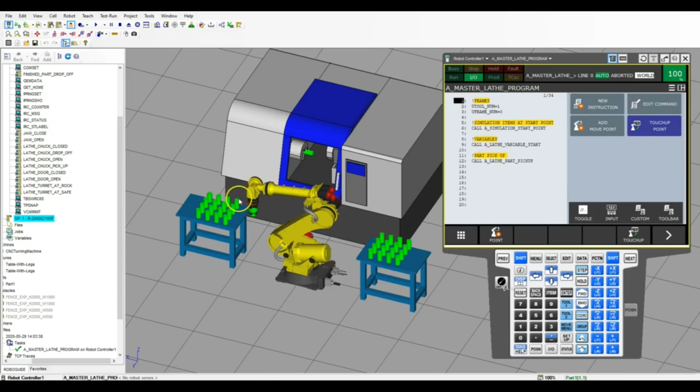So far we've got our frames, our simulations at start point, which is everything at rock and roll as if it was cutting. We have our variables, and inside our variables we initialized a bunch of position registers and also data registers. Then we have a part pickup, so the robot is ready to pick up and it goes back to the home position.

Now we need to start setting up the lathe position. The first thing we need to do is get the lathe to be in a safe position. Let's insert a new instruction, miscellaneous remark, and this is going to be our 'lathe safe and ready.' Now that we have that, we can first open our door.

So let's create a new program, and we're going to call this 'A lathe safe and ready.' Inside here, we're going to insert a new instruction and call it. The first thing we're going to do is open the door, so lathe door open.

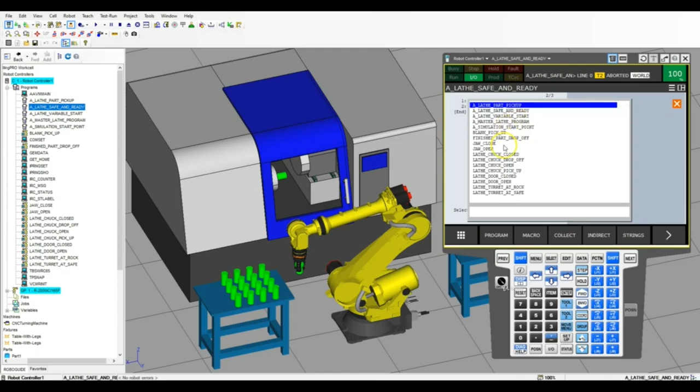Then we're going to put our turret in a safe position as well. New instruction, call program, lathe turret at safe position. And then we also want to make sure that the jaws of our chuck are open as well, so new instruction, call program, lathe chuck open. Now everything is at a safe position.

Let's go back to our main program, master lathe. So we made a master lathe program, and inside here we're going to insert a new instruction, call program, and go to lathe safe position, so lathe safe and ready.

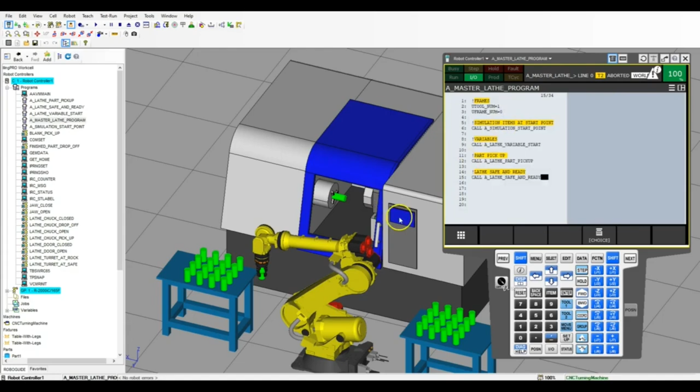So far, if I run this, it goes to pick up, clamps open, everything goes to safe position, clamp opens, and now we're ready to place our robot into the machine and then place our part into the machine. Let's go to lathe pickup, then new instruction, miscellaneous remark, and this is going to be lathe place.

And inside our lathe place, we're going to create a new program. So we're going to go select, create, and inside here we're going to call it 'A lathe place part.'

Then we're going to make sure our registers are all good, so I'm just going to remark frames, U-tool number 1, just in case. Best thing is to just be redundant so that things don't happen. Let's go edit command and insert about 20 lines so we have enough.

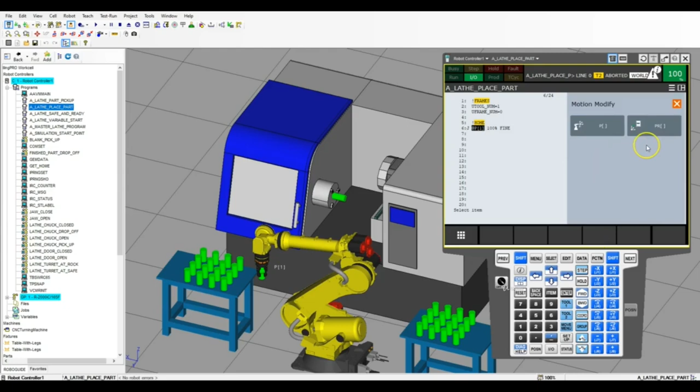And then the first thing we want to do is make sure we're in home position, just in case. I know we're in home position right now, but it doesn't hurt to make sure that we are in home position every single time we do this. So we're going to do a joint movement, and we're going to go position register number 1, home position.

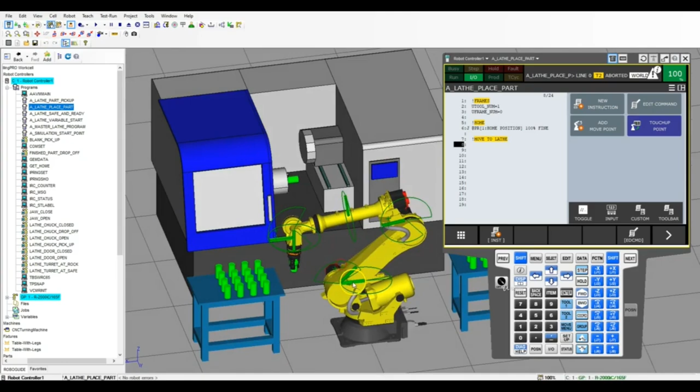Okay, so now that we're in home position, we're going to save a couple points and move our robot around. We can do that by first naming this—we're going to call it 'move to lathe.' I'm going to do this with a joint movement, so I can click inside here and start moving this around.

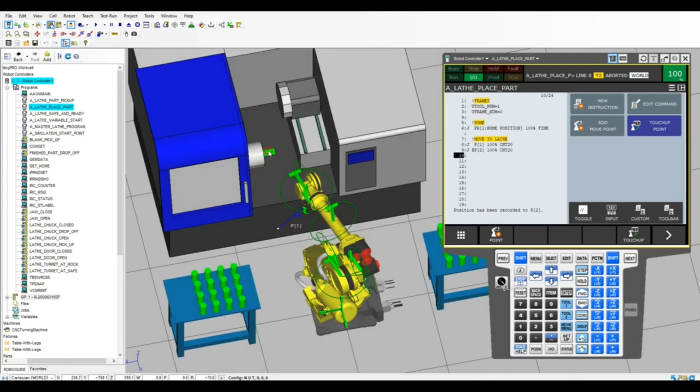So I'm going to add a move point and do a continuous move. Then I'm going to add another move point and do a continuous move again. I'm getting this into position and making sure I'm not going to run the robot into anything. Then I'm going to move to this position right here—I'll click the machine, go to parts, and then move to. We move right to our part exactly where we need it to be.

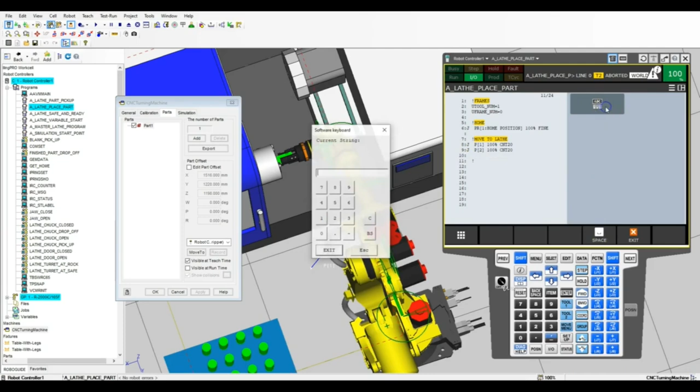So then we want to move into this position, including a safe position. I'm going to insert a new instruction, miscellaneous remark, and this is going to be my 'place safe position.' Then I'm going to add a move point and do a joint movement to that, and this is going to be position register number 3.

So I'm going to choose position register number 3, which is our lathe chuck that we saved from our previous video. And then we're going to add our tool offset, so right here we're going to go tool offset, position register.

Let's see what position register it was for the tool offset—I think it was 15. Moving on down, we have our original tool offset, which is the pickup and place. Our lathe tool offset is 15, so let's go back to edit and use 15.

So now that we are in that safe position, we want to move to the actual position. I'm going to go new instruction, miscellaneous, remark, and this is going to be place to chuck or move to chuck. And we're going to add a move point, doing a linear movement into that.

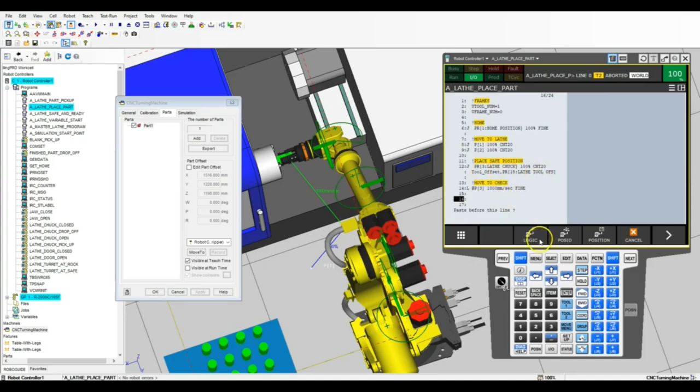So now that we have our safe position, move to chuck, we also have to now place our items. We need to add a few lines in here, and this is going to be the placing of the part. So we go new instruction, miscellaneous, remark, and we're going to say place this part.

I'm going to actually go simulation, new instruction, and then we're going to call program, and this is where we're going to place our object. So here we have lathe chuck drop off, so let's call that program. Then we have our safe place, so it should now move away from our position, and then we would move out of the robot as well.

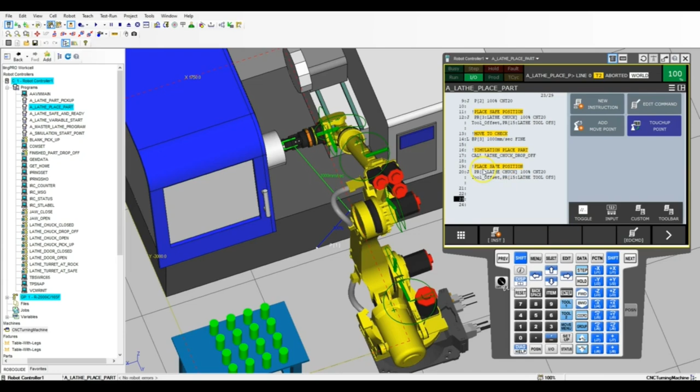So let's actually just run this and see what it looks like. Let's go to home position. Drops off, moves out. Okay, so looks like everything is good.

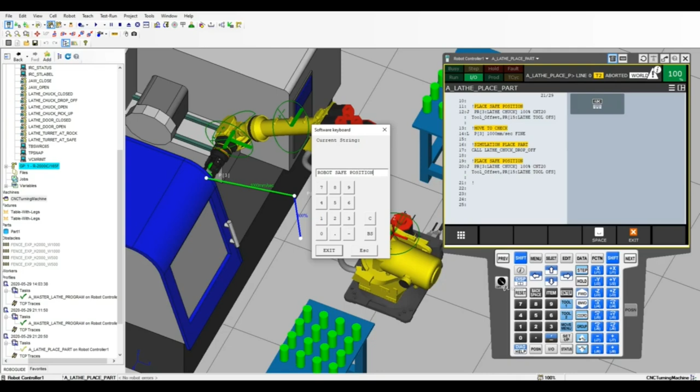Now we need to move our robot directly out so that the door can close. Let's go down to our area here, and we're going to now call this robot safe position, out of the way. And now we're going to add a couple different joint movements here so that we can get our robot out directly without moving it side to side.

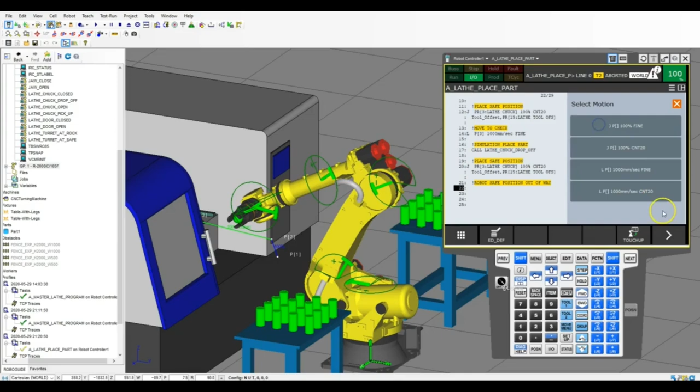So we just move it off to the side here, and I may do this in a couple different rotations. And we're going to do a linear movement out here so we know we're not jogging into anything else that we're not supposed to. So I'm going to do a linear fine from that position, keep moving it out, making sure that we are directly out of the way.

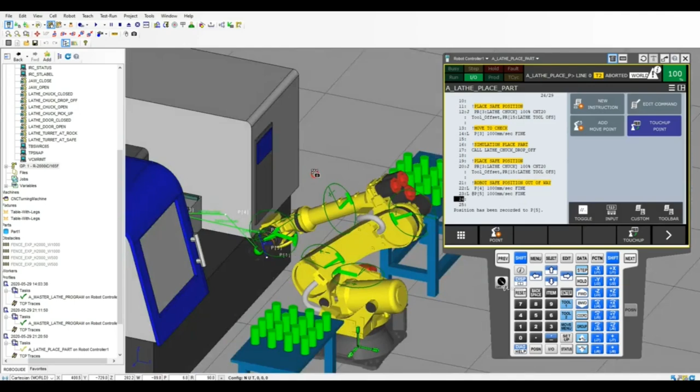It looks pretty close. Let's move this down just a hair bit. There we go. So now I'm going to add a move point, and then we're going to do a linear to that as well. So now that I have my robot out of the way, this program is now set.

So let's go back to our main program, master program, and then here's our lathe place. We're going to go new instruction, we're going to call program, we're going to go to the lathe place part. So now we have our lathe place part.

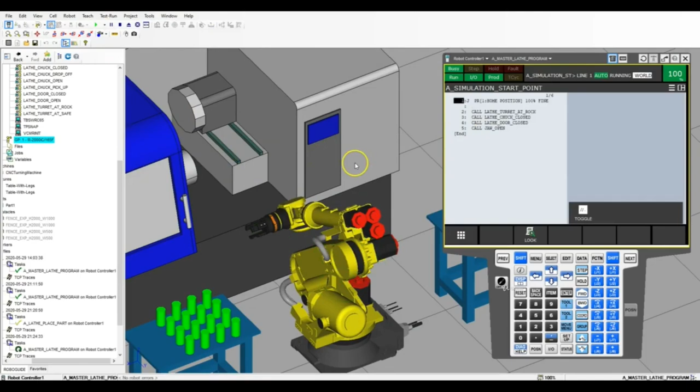So let's try this whole entire program out. I like to always try things out to make sure everything's working. Awesome, so far we got the robot out of the way, so now we need to put our lathe into rock and roll position. We actually already have this in rock and roll position, it's actually simulating the start point.

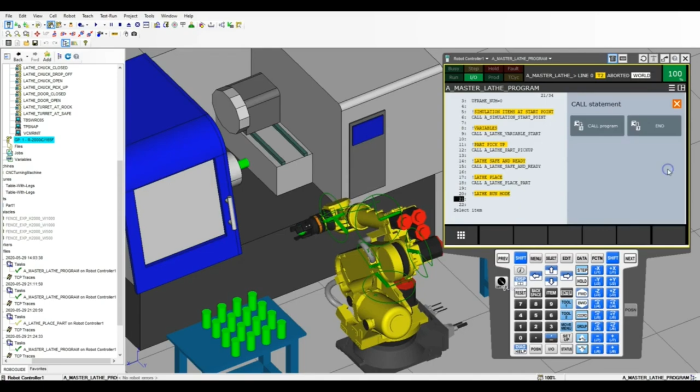So let's go new instruction, and let's turn on teach pendant first. Remark, and then we're going to run the machine, lathe run mode, and then we're going to go new instruction. We're going to call, and it's going to be simulate start point. Actually, I think simulate start point opens our chuck.

So going into simulation start point, it looks like we have a home position, lathe at rock and roll. The chuck is closed, which is good. Door is closed, and also the jaw is open.

So basically what we need to do is we need to get rid of this home position here out of this program so that we can use this. So let's actually delete this home program. I'm going to go in here, I'm going to go delete. Yes. So now it's doing everything that we need it to do.

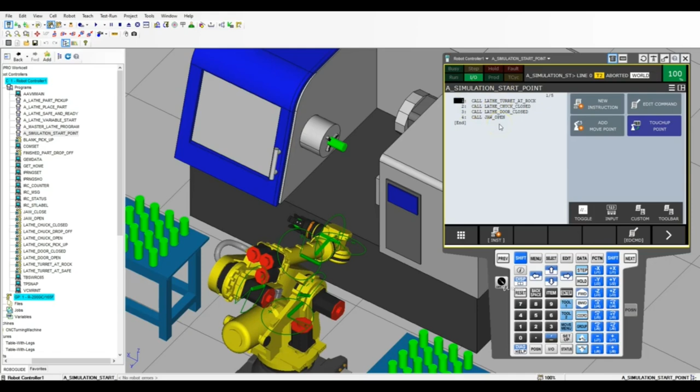So now let's go back to our program, master program. And before we get the simulate call starting point, let's add a home position before this as well. So we'll insert one line. We're going to go add move point, and we're going to do a joint movement, and this is going to go to our home position. So we're just taking it out of that program and placing it into our main program.

So now we have our home position, call simulation program, and now we can use the simulation program down here as well. So now our simulation program, now it should run the way it's supposed to. So let's check this.

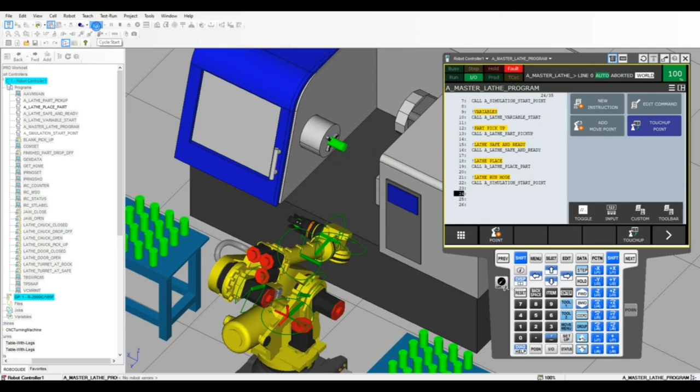There we go, so now we have our machine running. We could do a runtime of so much time, so let's do a wait, and let's say it's running for 3 seconds.

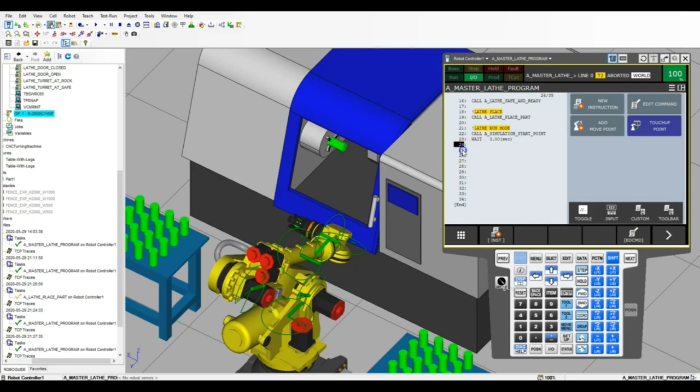Now that it's running, we need to open up the doors and everything else. So now that the lathe is ready, let's go new instruction, miscellaneous, and we're going to do this as a part pickup. Part pickup from lathe. The first thing we need to do is make sure our door is open.

So let's go and create a new program. Let's go select, create, and let's call this A.

And once again, just making sure that we have the proper frames correct. Always like to put in frames just to make sure that everything's good, just in case something moves. And I'm going to add some lines here, so I'll go 10 or so.

And now we're going to do the lathe safe, so new instruction, call. The first thing we want to do is open up the door, so lathe door open.

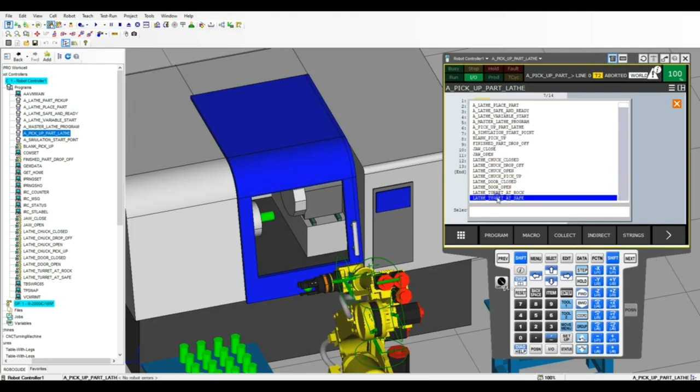And then we're going to move the turret out of the way, so we're going to call program, lathe turret safe position. So now that we're in safe position, now we need to move our robot back into place.

So we can now move back into here the same way that we did from our previous program. So let's actually move these things out of the way. So when we click number 5, I'm going to step, shift forward.

So now we have our stuff open and out of the way. So here we're going to move to safe position. Move to position inside lathe.

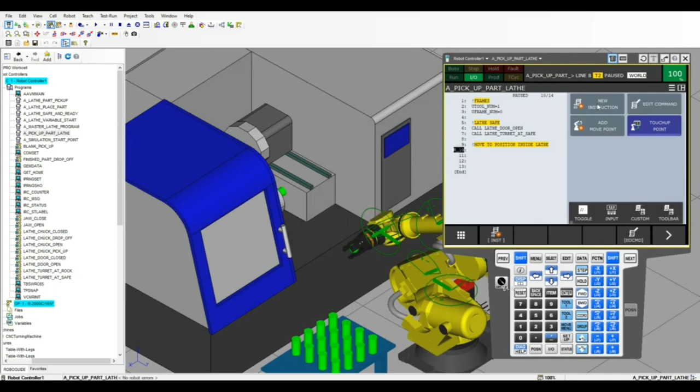So this one I'm going to start saving a couple move points here. Moving my robot in, making sure that we're doing a linear movement. There we go, and then we're going to now move to our safe position.

Insert a couple lines. And now we're going to match what we did for the placement of our object. So now we're going to add move point, and we're going to do a continuous, and we're going to use a position register here, position register number 3, and we're going to add our tool offset of 15.

So now that's at safe position. Now we're going to do the pick up position, but first we want to make sure that our claw is open. We never assume that things are open, we want to make sure that it is.

So basically inside here where we do the call, let's move it up here so that we know that our claw is open. So let's go new instruction, call program, and let's do jaw open so that we know that it is open before it even gets into the machine.

Now, yes, it is probably open from our previous program, but we never assume things. We always add it in there. It will just skip it if it's already at that position.

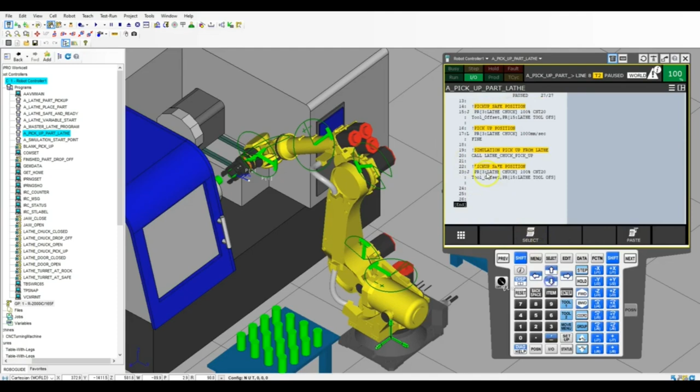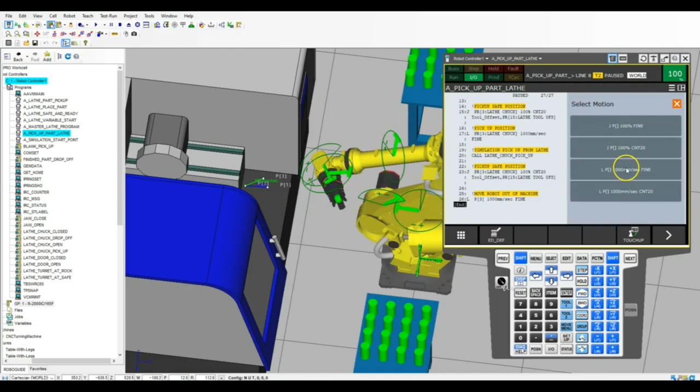So now we're out, and now we need to move out of the machine. Go add move point. I'm going to do this as a joint movement, and then I'm going to move it to the side to get ready for our movement inside here.

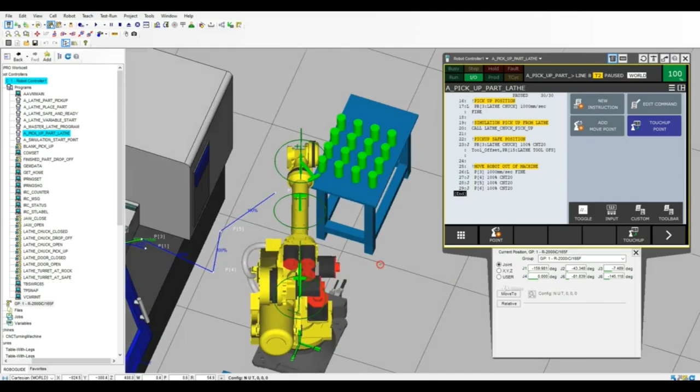There we go, so our final position from that place. Going all the way down and around and out of the machine. Then we can put our machine into our safe position.

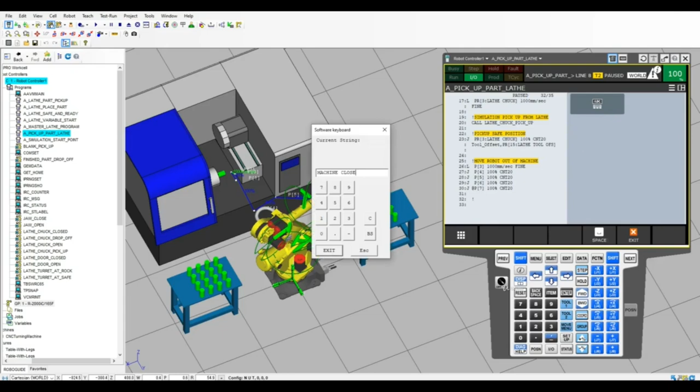And then let's call on that program to close up our machine. And then that ends our program. So let's go back into our master.

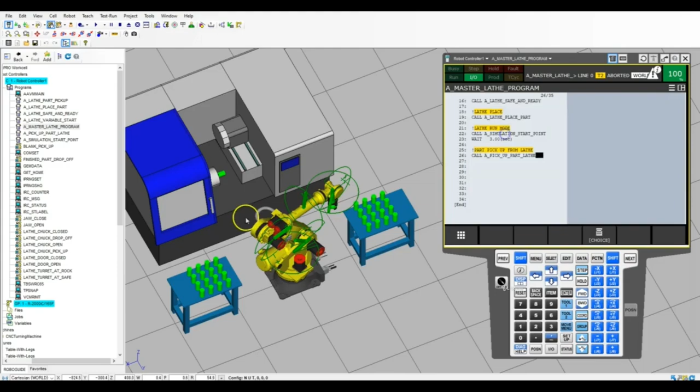Here's our pickup part lathe. Go new instruction, call, and pick up part lathe. So let's try this out, see what it looks like.

There we go. Next video we will do the placement, and then we'll do the for loops after that.